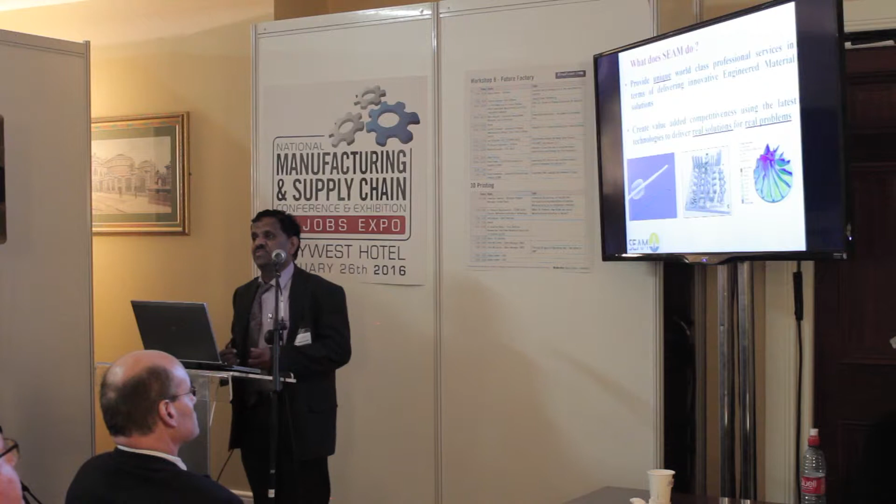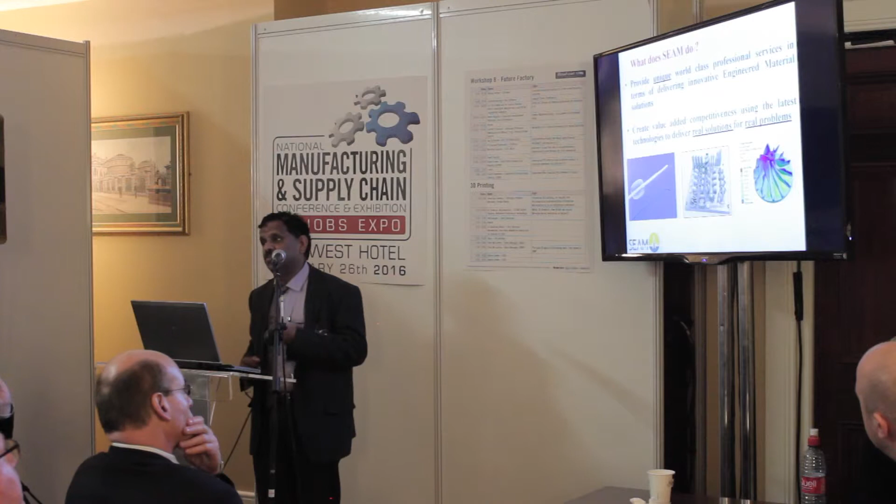What we do is provide unique world-class professional services to industries in terms of delivering innovative materials and solutions. Our objective is to create value-added competitiveness using the latest technologies to deliver real solutions for real problems. The reason I call it unique is that some of the technologies we have are unique for an academic center in Ireland. We are the CT scan experts in Ireland.

We have 2 big CT scanners. Through CT scanners, we do non-destructive 3D analysis of materials and components. We do product design optimization through overlaying the scanned CT data with the original data, and of course we do metrology solutions. We also do a lot of finite element modeling, and what's unique is that we have a commercial license to do FEA work.

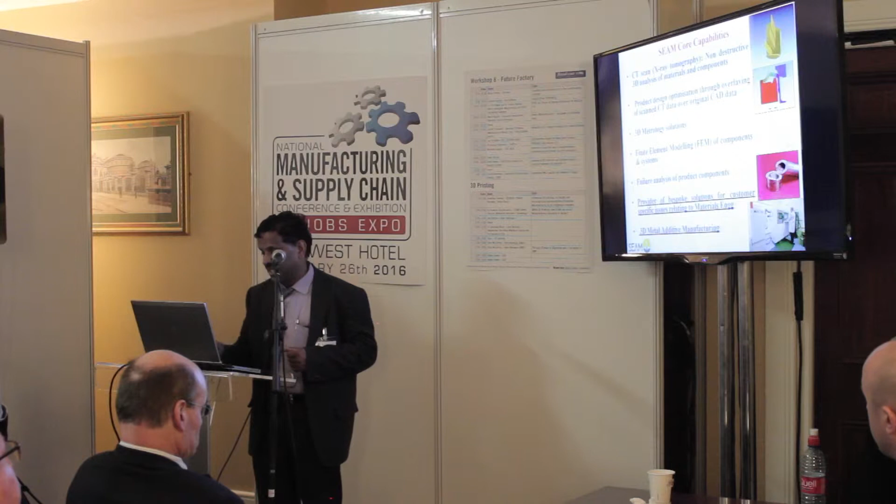Nearly 50% of our work is failure analysis on product components, where we provide bespoke solutions for customer-specific issues. Now we are getting into 3D metal additive manufacturing, which we've been doing for the last 1.5 years. We've helped over 110 companies in Ireland, spread all over.

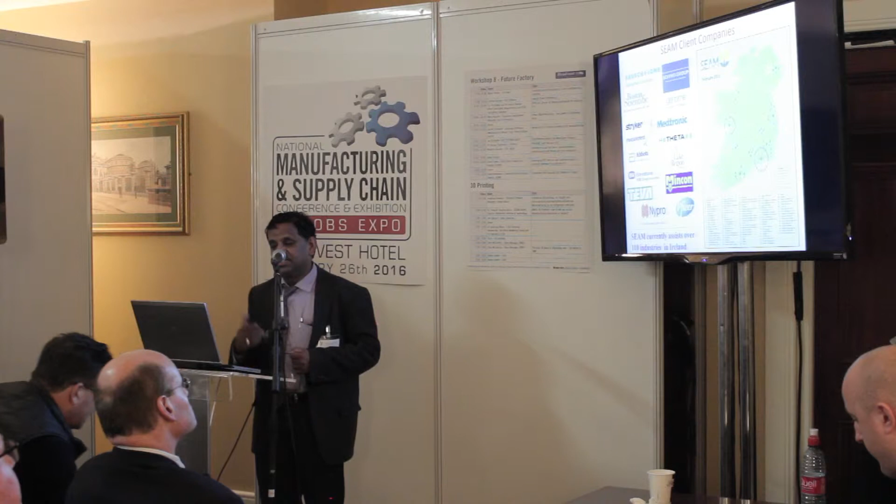Nearly 40% of our clients are in medical devices, 30% are in precision engineering, and the rest from other sectors.

In terms of accomplishment, we have executed over 900 direct-funded industrial projects since 2009, and as a result, last year we were awarded the KTI award for our industrial work.

Okay, now coming into 3D additive manufacturing. As Jonathan mentioned, additive manufacturing refers to a process by which digital 3D design data is used to build up a component layer by layer in the powdered material. But now 3D printing is increasingly used as a synonym for additive manufacturing.

In terms of principle, very briefly—I think you might know this, but I thought I'd include it—the DMLS process we have here, using the EOS M280 system, uses a laser to fuse metal powders into a mass that has a desired 3-dimensional shape. The laser selectively fuses the metal powder by scanning cross-sections generated from a 3D CAD or XMT.

One of the advantages at SEAM is that we have X-ray tomography, so if you don't have a CAD, we can try to generate that data and use it as input for the laser printing. After each cross-section is scanned, the powder bed is lowered by one layer, a new layer of material is applied on top, and the process is repeated.

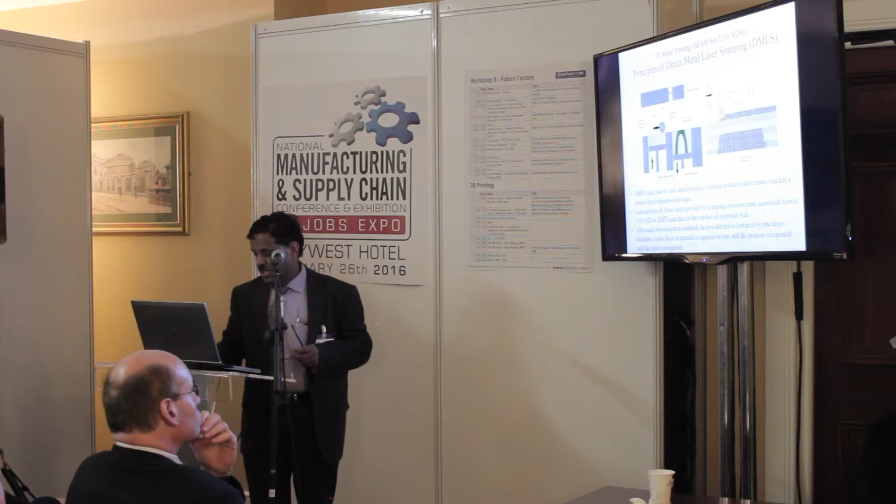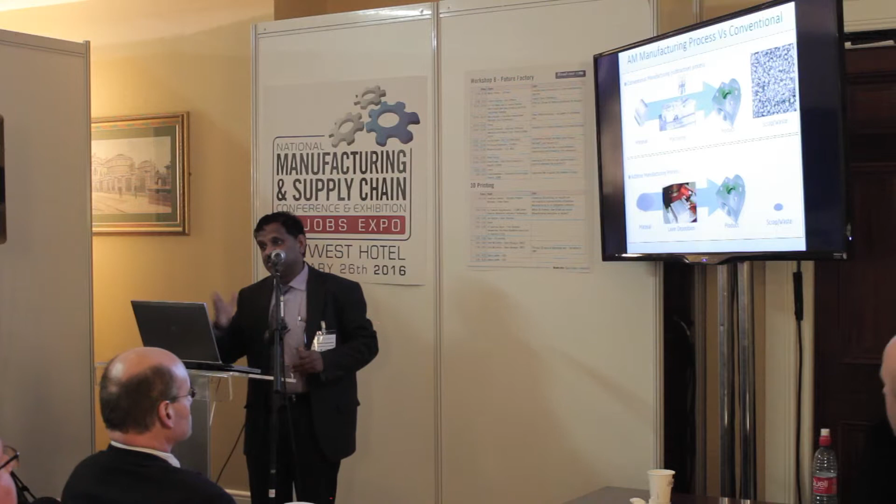Again, Jonathan just pointed this out: in terms of conventional versus additive manufacturing, in the conventional process you take a chunk of material and machine it to make your product, and as a result there's a lot of scrap or waste. Whereas in the case of AM, you start from base powder, deposit layer by layer, and build a product, so the wastage is almost minimum.

So the advantages—one of the key advantages of AM is designing complex components without adding cost limitations, skipping investment in manufacturing tools, changing designs without cancellation costs, short time to market, and disrupting the supply chain, which is one of the key advantages of AM.

So now the design process—this is what I want to spend a minute or two, or maybe 2 or 3 minutes, on.

Additive manufacturing technologies offer a high degree of freedom in design. In AM processes, the complexity of a part has very little effect, or even no impact, on the manufacturing cost. How this added value is achieved depends on the application. For example, it could be a lightweight design through topology optimization, a performance enhancement through a function-oriented shape, or the integration of functions in a single structure.

There are three design challenges in AM for young engineers. First, the engineer needs to identify those parts of a conventional design that will bring the most benefit when redesigning. Second, you need to break with the rules of conventional manufacturing to exploit the full advantages of additive manufacturing—you need a totally different mindset for AM. Third, you need to incorporate this new approach into the process of designing the product component.

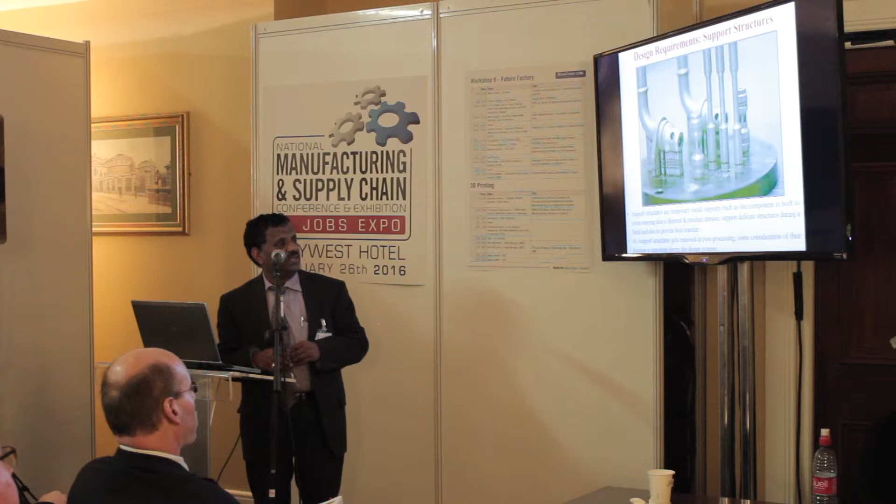In additive manufacturing, you have to build a support structure. You cannot build the product directly onto a build plate because of heat transfer and warping issues. Support structures are built from the same material as the part. They are temporary supports built as the component is built, to resist warping due to thermal and residual stresses, to support delicate structures during the build, and to provide heat transfer. This support structure gets removed after building, so consideration of it is important during the design process.

Support structure itself is a huge area. A few things to point out when generating a support structure: since it gets removed, you need to make sure the removability problem is addressed, and build accordingly. There's also the heat transfer requirement—wherever the part requires heat transfer, you need to provide support structure. Then there's massive powder inclusions—when building the support structure, powder may get clogged in, which can affect your CNC machining afterward. There are also issues like delaminating risk and surface quality concerns.

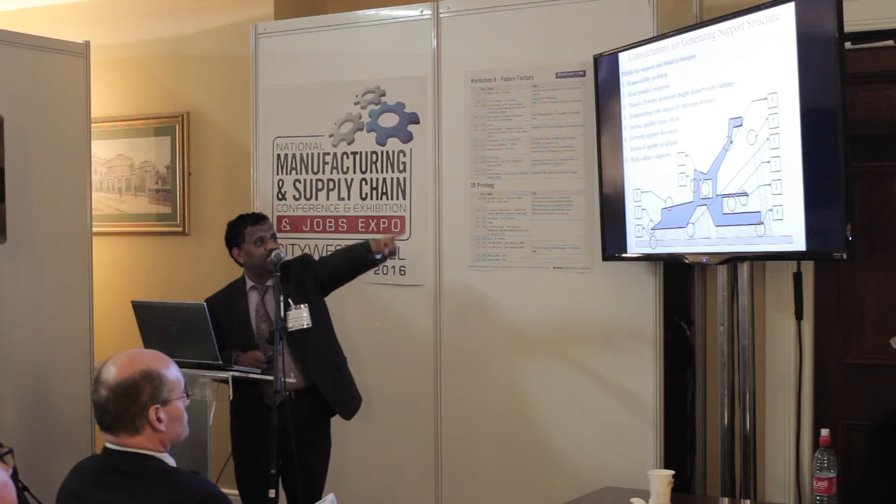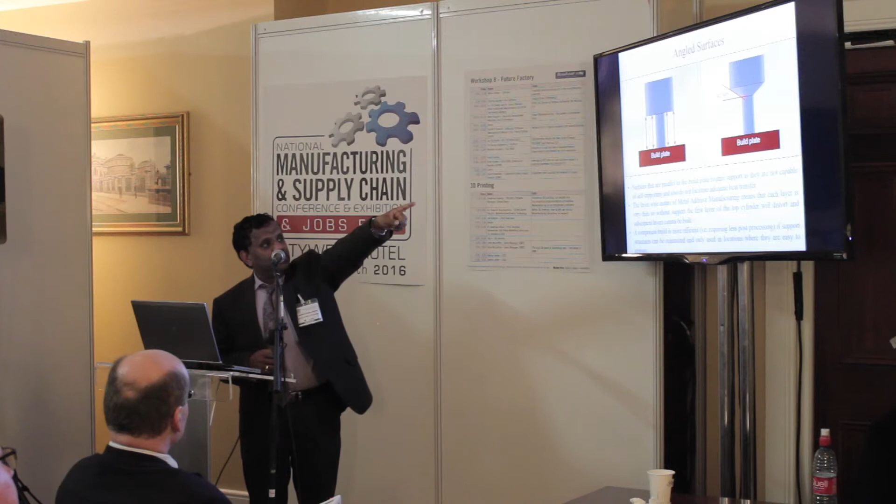For example, if you're building a structure like point number 8, you need a kind of high-solidity support structure. These are things a design engineer should be aware of and careful about when building support structures. In terms of angled surfaces, if you want to build a cylinder parallel to the build plate, that requires a support structure. Whereas if you build an angled surface instead, you can eliminate the support structure. So you should try to minimize the support structure when designing a product.

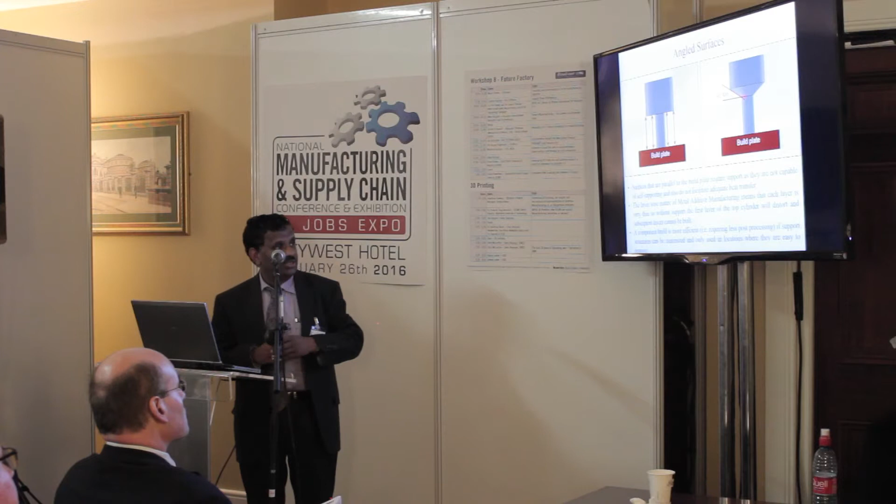Then there's part orientation. For example, if you're building a cylindrical product, whether you build it horizontally, vertically, or at an angle all impacts part accuracy and cycle time. You need to decide what is the correct support structure for any given part.

Thinking about additive design, it's very important to consider the function of the device and its critical physical design requirements, and build on that foundation. Build a component around these requirements and add material as needed to facilitate those functions. Finally, add constraints required, like a support structure. You should think from that angle—future engineers in additive manufacturing need a totally different mindset.

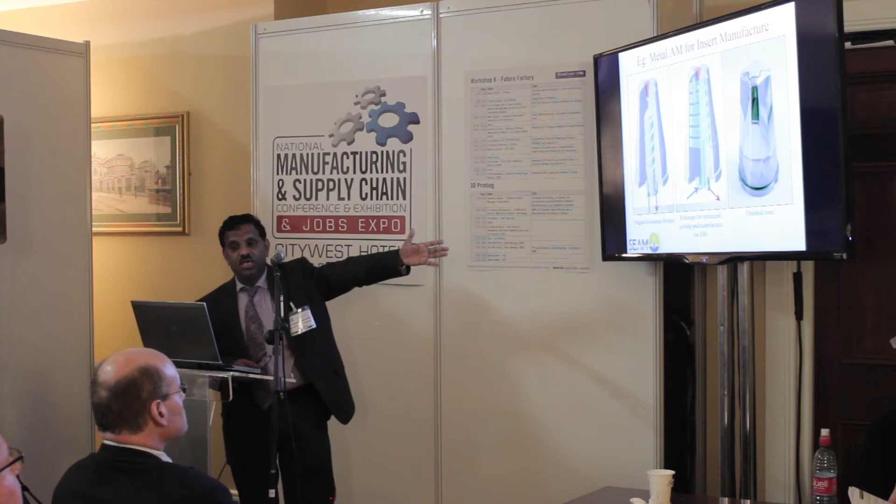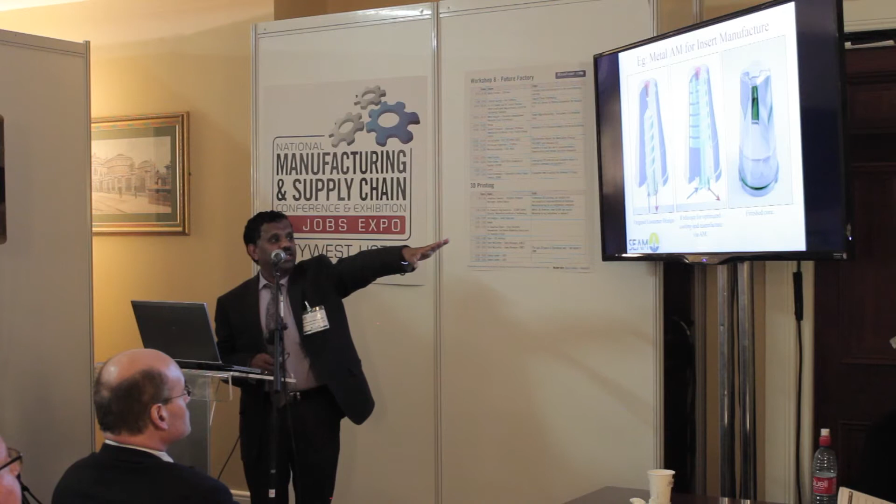For example, earlier insert manufacturing always used to be an assembly, with a single core and water used for a cooling cycle. Now you can replace that assembly using a helical cooling coil, giving you a single part. By doing that, it reduces cycle time and gives superior product performance, because you get superior cooling performance.

Another aspect I'd like to mention is design optimization through CFD, FEA, and additive manufacturing. AM technologies provide great opportunities to reduce the weight of components and streamline design. However, in the past, parts were always over-engineered.

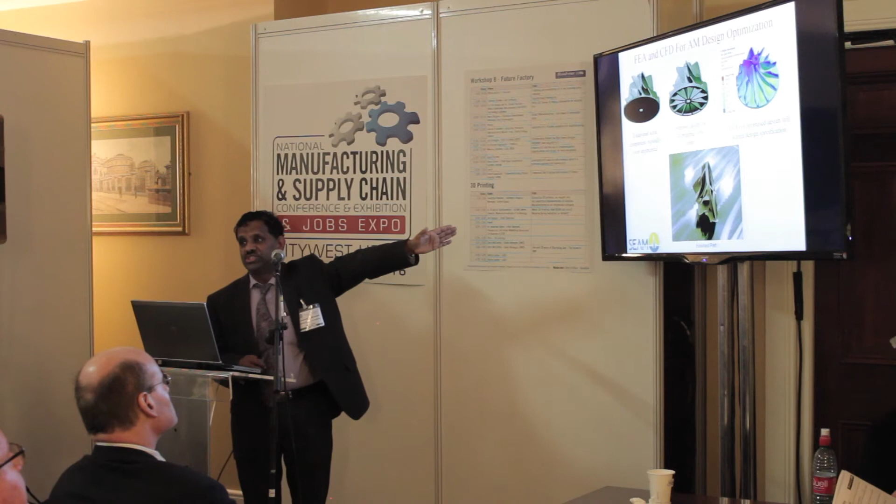Now under AM, there's a good possibility of under-engineering, so FEA modeling strategies can be used to mitigate this and ensure design robustness and quality. A component that's typically over-engineered, through AM technology, we can reduce the part and still maintain the same properties. In fact, we've built this part and the properties are exactly the same, using the FEA strategy. Okay, so that's all about the design part.

In terms of build process, in-house we have an M280 system, which is a 200-watt ytterbium fiber laser. It can accept 3D AutoCAD files and STL files from our tomography as well. We've got a build volume of 250 by 250 by 325 millimeters, with the ability to optimize material. At present, we can print maraging steel, stainless steel, Ti6Al4V, and nickel alloys. These are the four areas we've been working on.

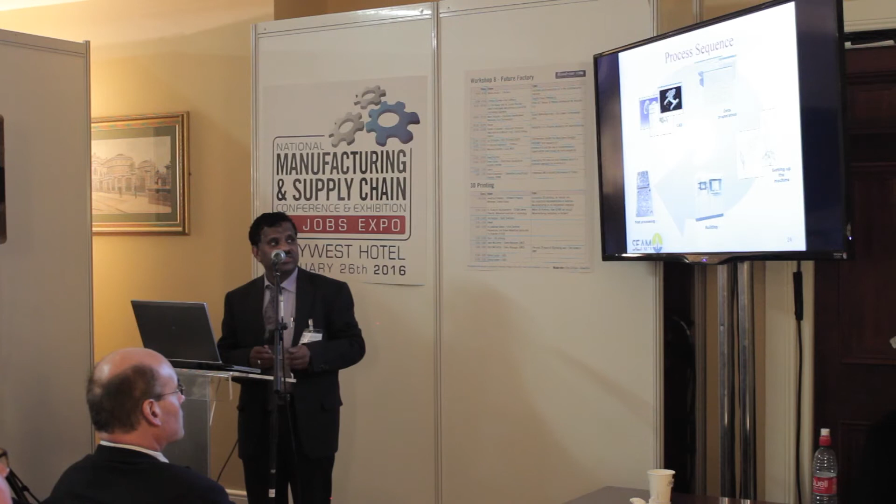And then the process sequence, as Jonathan already pointed out, you start off with the CAD, prepare the data, set up the machine, run the build process, and then do the post-processing, and you get your product out.

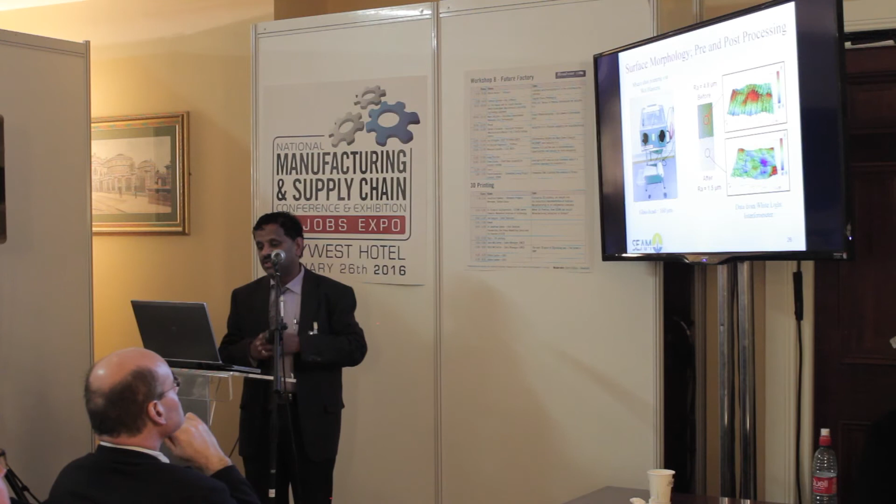We have very good powder characterizing facilities for incoming powders, and post-processing is very important. We have shot peening, and we do white light interferometry to check the surface roughness before and after. For some products, especially titanium, you need heat treatment because of residual stresses, so we have a heat treatment furnace, a gas-controlled furnace.

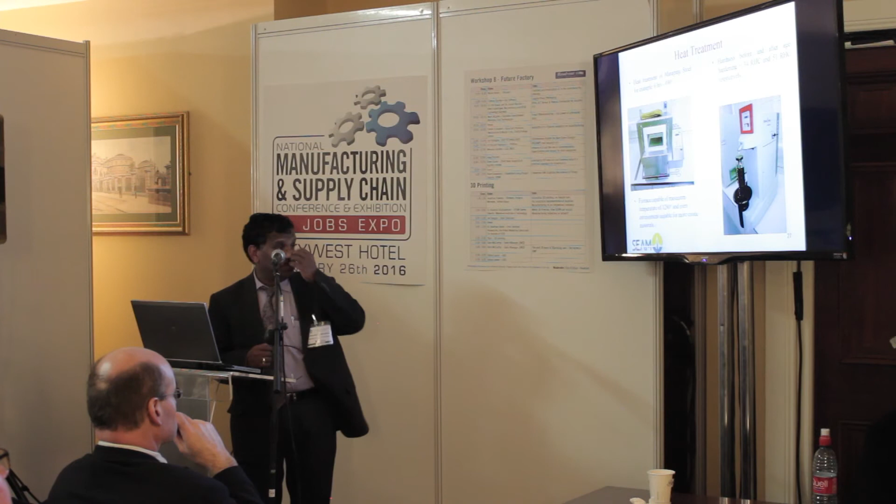Validation technique is one of the key things. As Jonathan pointed out, how sure can you be your product is good, and whether every layer has been sintered? One of the greatest advantages is that we now have CT scanners—in fact, we have two. Through that we can evaluate product integrity, then do metrology and nominal comparisons.

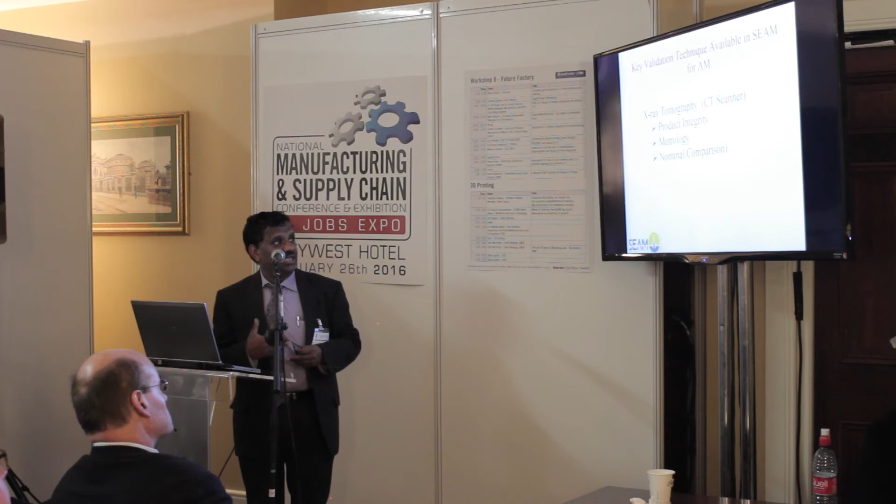For example, we have a 180 kV nano system for doing low density metallic parts and also polymers. And then we have a 300 kV system—this is unique in Ireland, we are the only one to have this system. Through this we can analyze stainless steel, Inconel, and so forth.

The key features of CT are the main important thing: it's non-destructive, it can visualize objects in three dimensions, and once you do that, we can characterize voids, warping, delaminations, and do coordinate measurements and comparison.

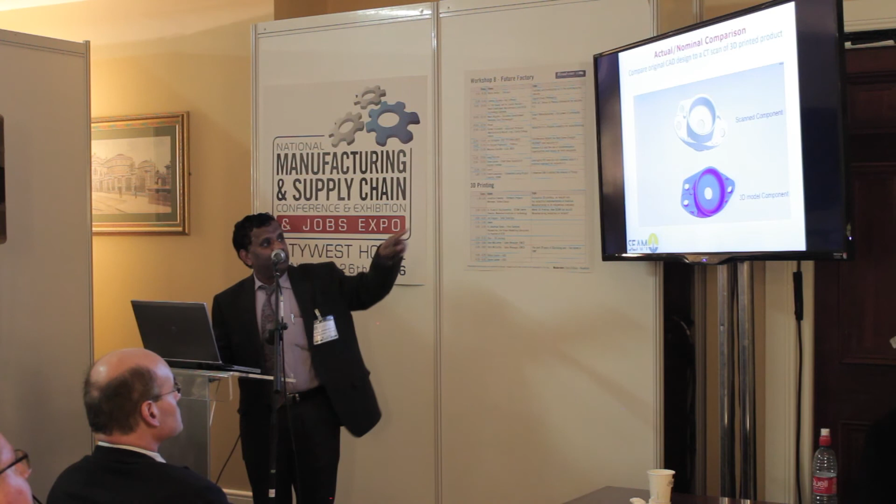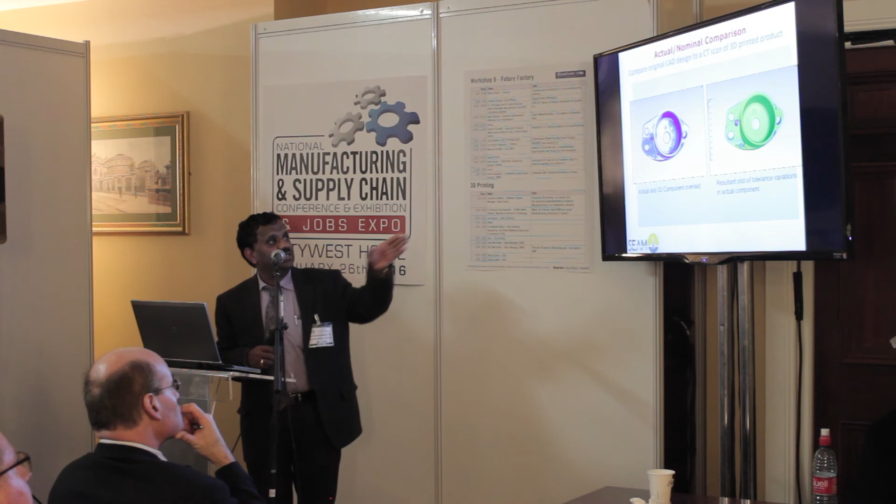What I mean by nominal comparison—just to give an example—the top one is a CT scan of the part, and the bottom one is a CAD model of the same part. Once you do the CT, you can overlay the CT part with the original CAD file and visually see the variances.

All the green areas are right in the middle of the spec, the blue areas are below spec, and the red regions are above spec. So you can visually see the variances between the finished product and the original CAD.

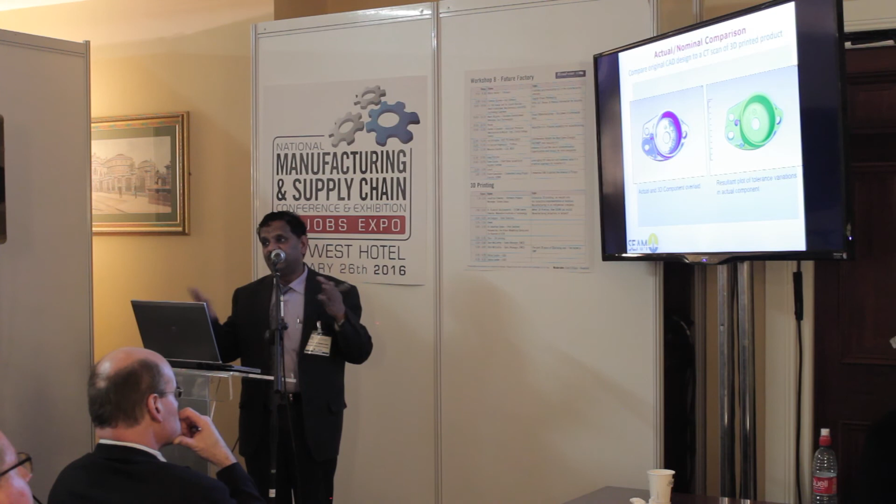Other techniques we use for validation include scanning electron microscopy with EDS attachment, white light interferometry, and we're very good at microstructuring and optical metrology, plus optical microscopy if you want to find inclusions or anything like that. And we have all the mechanical properties testing like Instron and hardness testers and so forth.

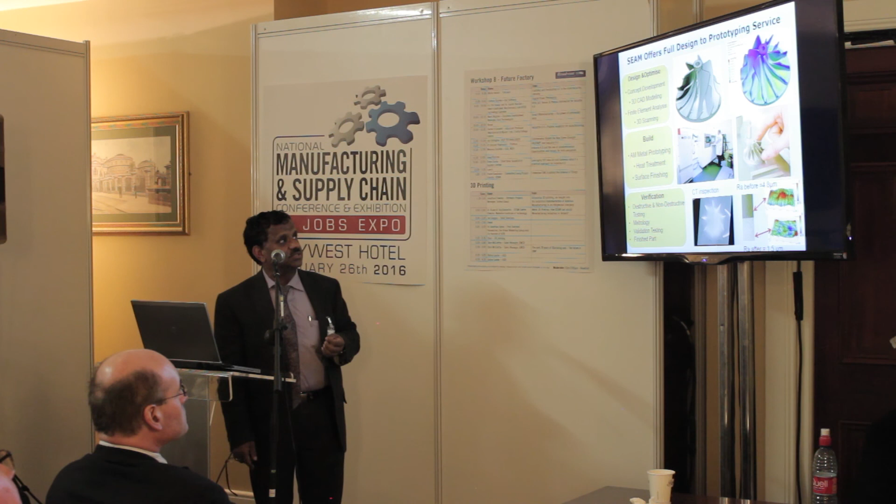What we're currently offering is a full design-to-prototyping service in 3D metal printing. We can develop the concept—we have excellent engineers in-house—then do the CAD model, and of course FEA is our strength. We've done a lot of innovation partnership projects with FEA, and we have CT scanner capability. Then we can build the parts, do post-processing, and verify the parts.